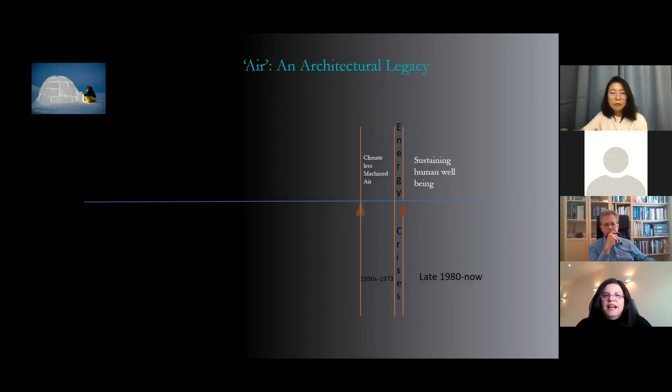But air has actually had a major role to play, and if anything, if we review the architectural legacy, it actually tells us something about who's breathing this air.

So if you look at ancient Egyptian temples, you find that the great court here, meant for the public, the common people, to come and appreciate the king and the elite priests, they were only allowed through a very small door that would humble their existence into this courtyard that was not shaded at all, left in the sun, feeling very uncomfortable with the temperature of air, while all the priests and the elites of the government would enjoy the hypostyle hall, where for the first time the idea of the clerestory is introduced, and the hot air would rise up, leaving them feeling cool.

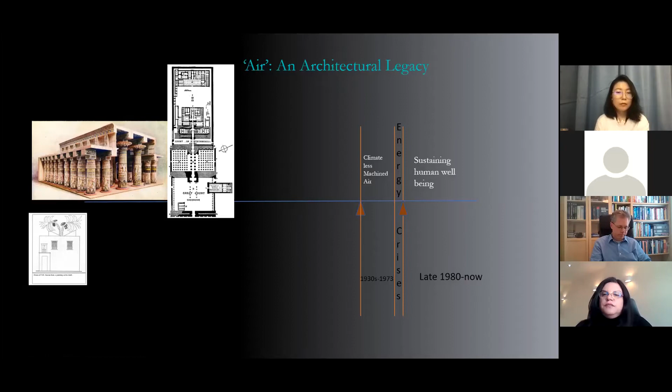Courtyard houses, as often mentioned in literature, are another case of understanding how air differentiates between people, because the wealthier the merchants were, the wealthier the owners were, the bigger the courtyards and architectural systems they would own. And it's important to mention the word 'systems' here because they were not elements - vernacular architecture worked on the principle of systems. So the air pressure differences between the openings, the wind catcher, and the courtyard would all interface together to provide a comfortable environment.

But if anything, they show us how the elite constructed their buildings with sustainable materials, very expensive wood, and provided those courtyards lavish in their landscape with their pools just to temper the air, in what we would consider vernacular architecture.

And if we go further to Cairo again, where we look at the 16th century courtyard houses - Beit al-Sihaymi, for instance - lavish with its courtyards and very large areas of openings, almost 90% window-to-wall ratio, covered by beautifully constructed wooden lattices that capture the idea of how air moves. So the openings of those wooden lattices were changed to allow air from the bottom to escape from the top, and also the building height would influence that.

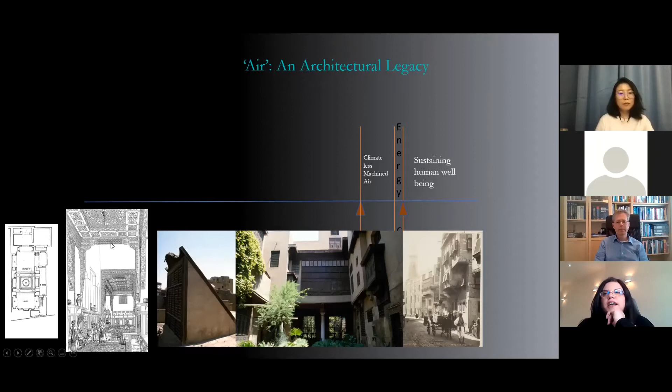If we go even further in history, look at 16th century Europe onwards, providing houses that are built on rivers where the air velocity is known to be the highest because it's unobstructed, and that would allow for natural ventilation.

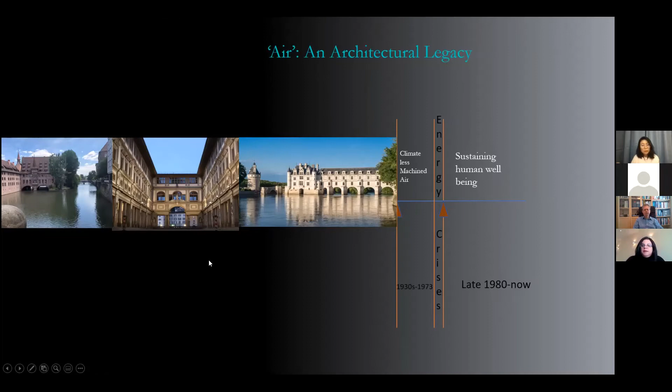But if we look at the size of the openings and the width of the plan, it's always better ventilation for the richer, while the poorer would have smaller windows. This is even manifested in the facades, like Chateau Chenonceau in the Loire Valley.

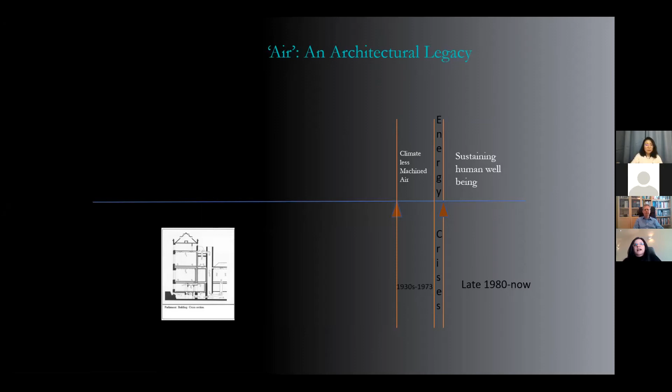Going forward to the UK Parliament, air forms a different kind of expression because air is drawn to the bottom, then heated, and then circulated through the building using this stack effect of buoyancy.

But it's disconcerting because it really highlights this quote mentioned by Adley: an analysis of air reveals who belongs and who does not, who is deserving and who is not, in a constellation of megacity inequality. And if anything, this still unfortunately exists.

So if we look at how air influenced the formation of plans, sections and elevations of buildings, office buildings give us a good start - the U shape, the square shape with an enclosed courtyard, or the Chrysler building, a 1930s multi-story building, quite complex but naturally ventilated.

Let's not share air - air needs to be mechanized, controlled, to the point that we can import this architecture to anywhere in the world.

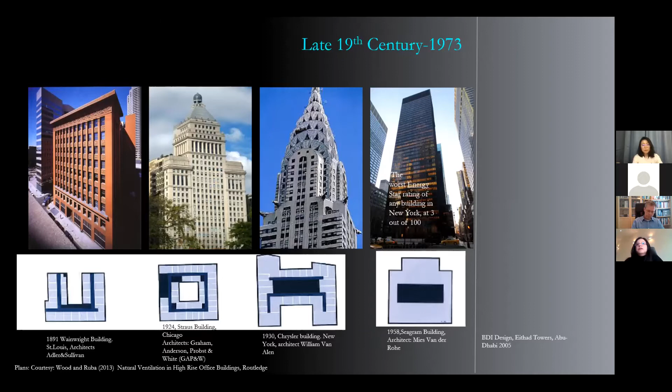How air is used and expressed in buildings is quite interesting when we look at the 1950s idea of Buckminster Fuller, when he said it's more ecological, more sustainable to cover the whole of Manhattan in a geodesic dome that would control the air inside.

Not an idea that was discarded, but actually taken forward. If you look at BDI's design of the Etihad Tower in Abu Dhabi, one of the hottest spots on Earth, it's now being constructed where air is totally controlled by filters and no natural ventilation is allowed at all. The elite do not share our air.

But air is invisible and we need to quantify it. So we really need to use building and urban performance simulation.

We would have a lot of heated debates about this between us, me and Peter. But we would look at how the urban population is moving from 50 to 80% by 2050 to live in cities, with all the challenges that come with this kind of scenario, like heat islands.

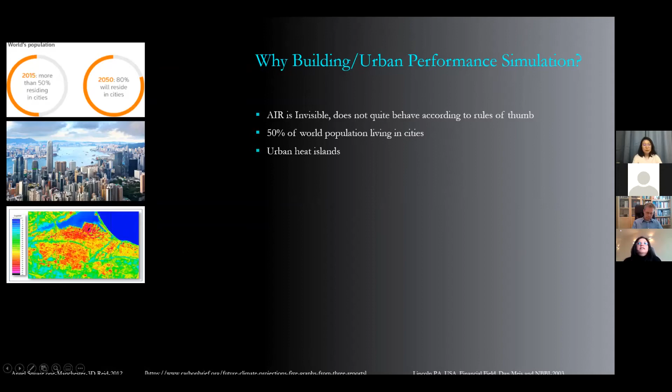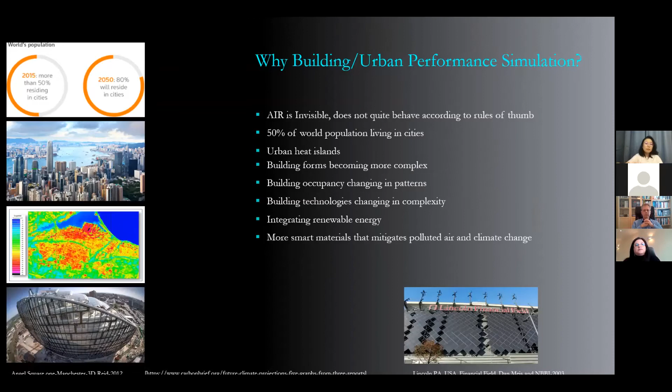And all the different aspirations to use more complicated building forms and address ideas of changing occupancy, energy, pollution, and climate change. But we've also always looked at vernacular architecture as a successful precedent for applying fresh air.

It's interesting to know that through the writings of authors like Pallasmaa, it was advocated that the sense of touch is very important.

But actually, if you look at how commercial branding works, there is this very influential statement from Lindstrom that says 80% of all commercial communications appeal only to the sense of our eyes, yet 75% of our day-to-day emotions are influenced by what we smell.

If we look at vernacular paintings of Cairo, for instance, you would see that by trial and error, commercial activities dictated an environment of fresh air, manifested in how the roof was constructed. The more regular, higher quality timbers used also reflected the type of merchandise and the quality of air.

So keeping all the hot air on the top and the fresh air on the bottom of the market, where silk would be sold in this case.

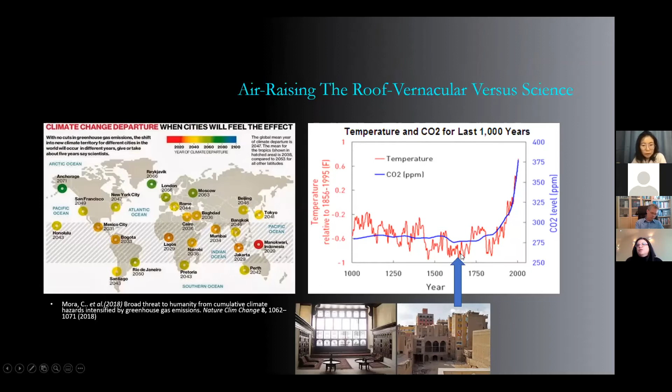We have to be quite careful, because climate change is affecting a lot of cities, and Cairo is one of them as a megacity. Most of the cities where vernacular heritage exists are experiencing major changes, whether in their urban form or in the temperature where they originally existed. If you look at the Max Planck Institute data, you'd see that Cairo and Dhaka are among the most polluted cities.

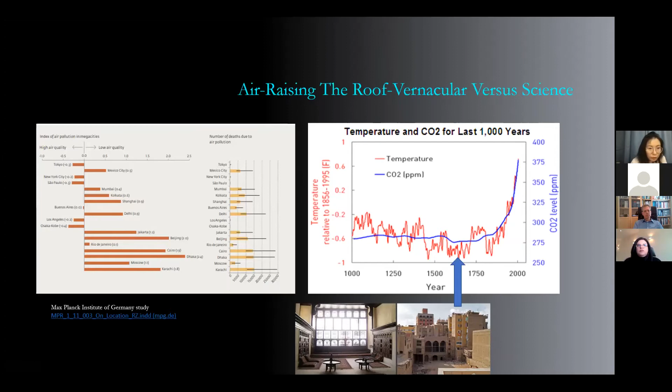An opportunity presented itself to look at the differences between renovated and non-renovated urban scale heritage, when UNESCO attempted to renovate the oldest spine in Cairo, the Fatimid Cairo. That city itself is a small city among others in Cairo at the moment, and it was constructed in 969 AD.

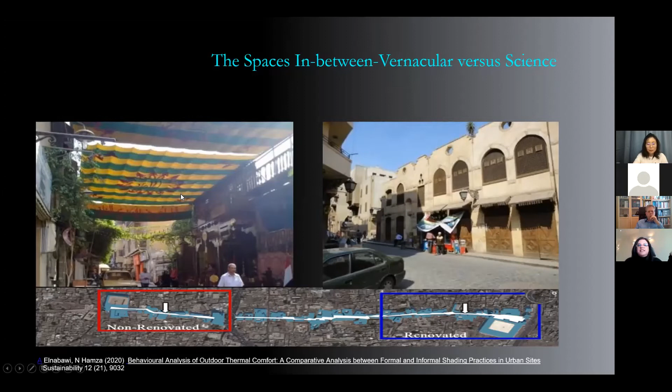UNESCO renovated part of it, and as you can see, removed all shading systems, unified the facades and shop openings, really trying to gentrify it. In the other non-renovated part, occupants and users of the space were left to do whatever they wanted, and in this case, by trial and error, shaded it with a retractable system. So we were interested to know which space would perform better.

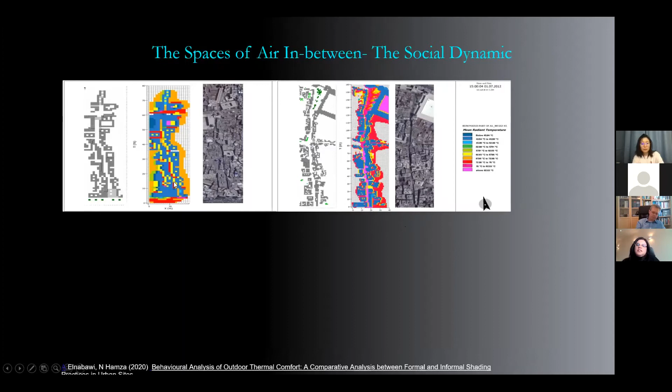Through dynamic urban simulation, this is the spine of the renovated area, and this is the spine of the non-renovated area. You can quickly realize that the mean radiant temperature in the non-renovated part is actually performing quite better, with sometimes about 10 degrees difference.

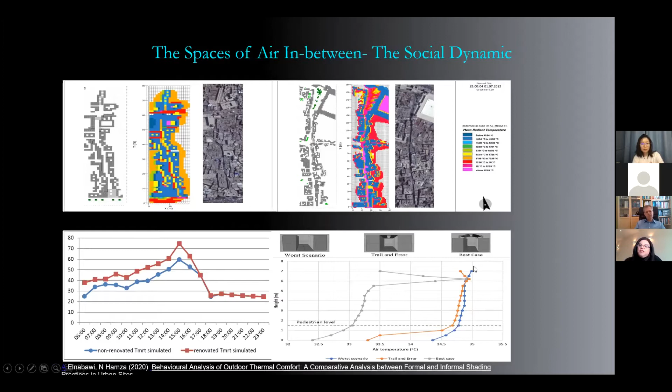So the unshaded part was really the worst scenario undertaken by UNESCO. The trial and error approach, which responded to the historical paintings of the area, was doing much better, but even better when we quantified it and studied this effect using simulation and looked at another configuration that could also be used to cover the markets.

Markets are interesting because they evolved, and in Cairo specifically, the center of Cairo—most of you would have seen it in the recent presentation of the movement of the mummies to the museum—that central part of Cairo was also designed by Haussmann, so it's known as Paris by the Nile.

In this area there was a lot of image importation of architecture. So the green indoor markets were introduced as a symbol of providing a place for the elite to come and visit and do their vegetable shopping during the day.

What was interesting here is that, again, trial and error provided excellent levels of ventilation. As you can see, the shops were able to maintain the outdoor temperature profile indoors without anything—this is different from talking about thermal comfort in the cities here.

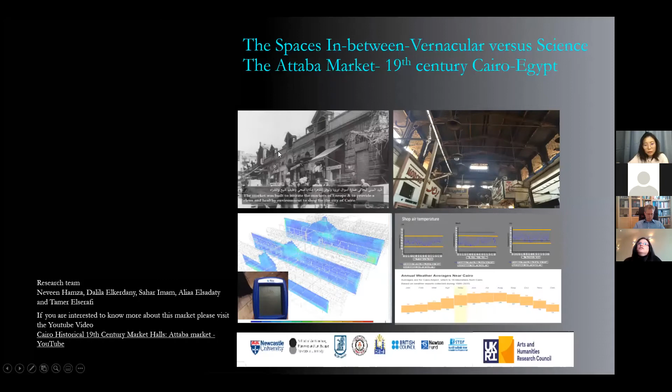The natural ventilation was working, and most importantly, although outside the market at the moment the levels of vehicular movement increased to very high levels, creating very high levels of carbon dioxide as a base—586 ppm rather than the usual 350-400 level—the building itself, through its natural ventilation elements and their expression, was able to keep the building as it is.

Most interestingly, what we found out as a research team—this took place with Cairo University, funded by the AHRC—was that revisitation behavior was actually influenced by the invisible environments these buildings create: air, light and sound levels, with air playing the most dominant feature in the appreciation of the building and revisiting it. If you look at the shop owners who have been there for three generations, their story was a little bit different.

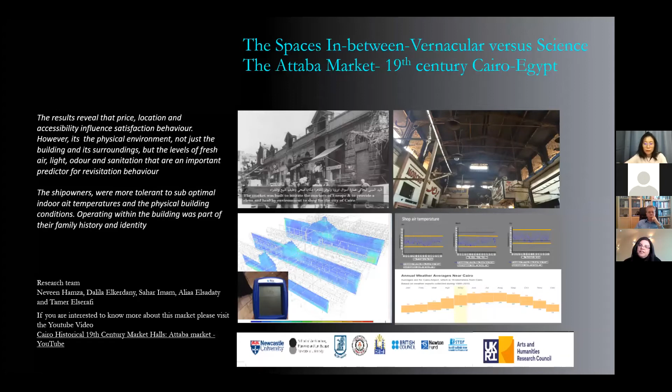They were more tolerant to what we would call suboptimal thermal comfort conditions and suboptimal air quality conditions, because of the carbon dioxide transmitted in the air, but they looked at it with pride. We found the same thing, that this issue of appreciating the building, that it gives us a sense of pride, has also had its implication when we were studying houses in Tibet, in China.

So just to draw this to a closer zoom in on architecture, we now require a much higher level and much more challenging functions of the facades we design.

So it's not just about being a climate separator, it's about being a climate moderator, and it's about providing healthy environments indoor, and of course, generate its own energy, be able to heal. And in this post-COVID environment, we wanted to provide higher levels of natural ventilation, but reduce energy demand. So this, I think, will be somewhat our next challenge.

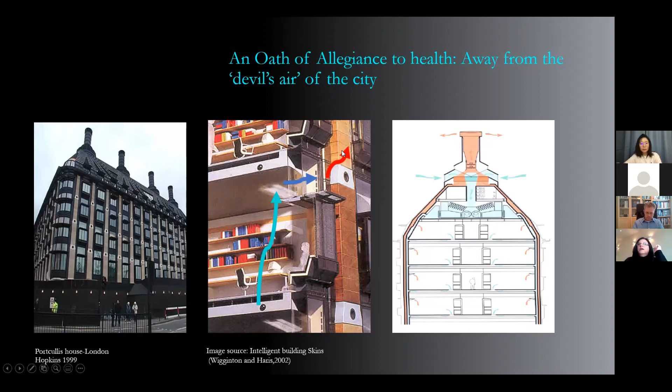Air cushioning in facades is well documented. It started by an idea of wanting to control sound levels, sound level transmissions between the outdoor environment and indoor environment, but then the cavity and the benefits that you could reap from controlling the air inside this cavity started to manifest themselves. So sometimes we use them for natural ventilation, sometimes we use them as an external duct to extract all the air outside the building.

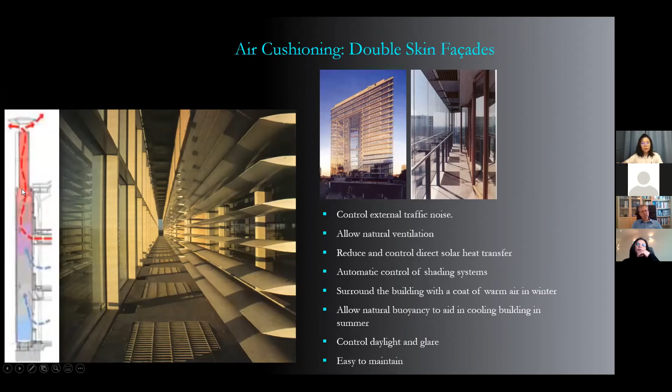But as you all know, hot air always rises, and it even has a further influence on our facade design, because we need to heighten the cavity more than the final floor, the top floor, to avoid overheating of that top floor.

So double skin facades in this case started to play different expressions, and this is a project I was quite honored to work on. It's the Newcastle City Centre Police Station, and we used building performance simulation a lot to convince the team that we could provide natural ventilation without introducing higher sound levels to the call center, which the new part of the building was going to be used for.

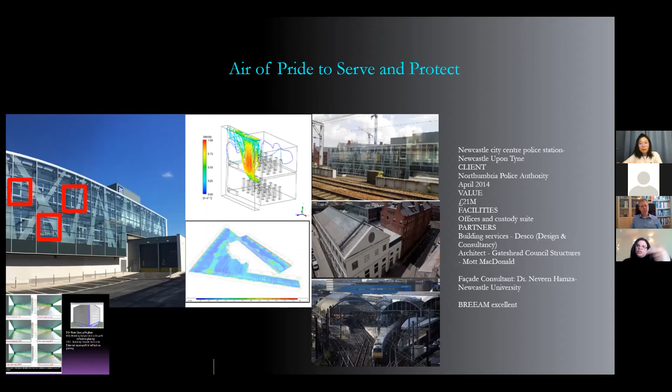And through building simulation, we managed to understand that air can be a lazy medium and it just likes to rise. So that lent itself to not putting windows on top of each other, rather juxtaposed, to allow for vitiated air to rise without short circuiting and affecting the health of other people inside on the top floor.

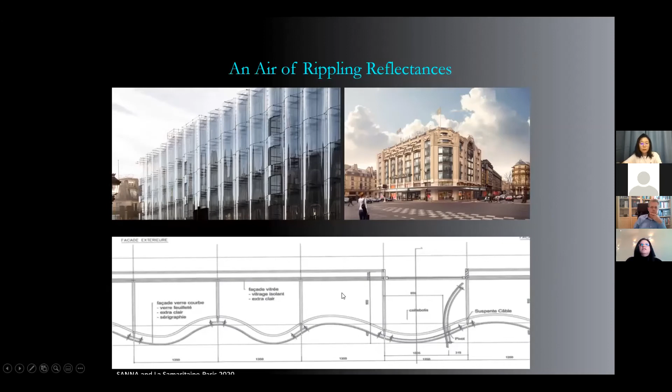So another one, we can't talk about air without talking about Swiss Re, an iconic building. I have to say courtesy to Hilson Moran for providing their simulations and drawings. An aerodynamic form that promotes views out, and the original intention of providing natural ventilation through courtyards, now called the office fingers, six of them on every typical floor, really trying to adopt this idea that we provide air as much as we can to the occupants.

An idea that didn't end up well, because unfortunately one of those natural ventilation panels fell on the plaza in 2005, and of course the easiest solution was prevent natural ventilation, forget it, we have a mechanical system, that's it. And the idea of stopping natural ventilation was not really helped, because the office space had a mechanical system that circulated air. So in every finger, fresh air would be taken from the floor, circulated in the cavity, and then recirculated in the system through the plinth.

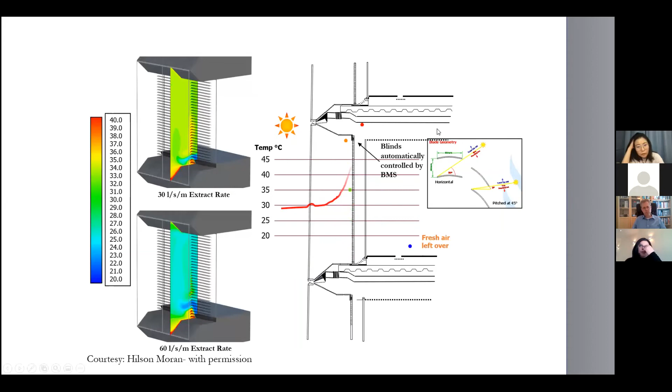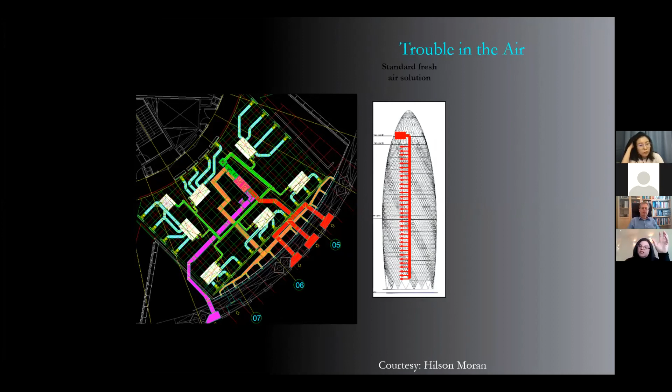As you can see here, the whole idea was providing mechanized air through each finger, so they can only use different parts of the building, very, very different from a traditional building where the air conditioning system is put on the top and circulates to the whole height of the building.

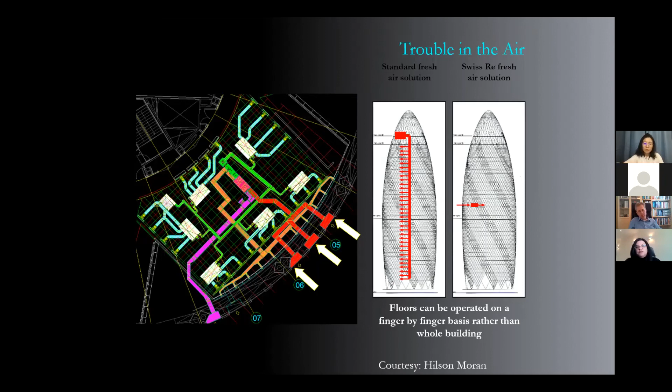So individual ones, but soon the occupants of the building started to complain of stale air. And this is an issue that is not uncommon in buildings that are controlled in this manner, unfortunately. And from then they stopped all forms of natural ventilation. And if we look deeper into it, the building services engineer provided the compliance with the regulation, in this case 5 meters per second, but instead of increasing the velocity, the idea was just to stop it altogether.

Another case where civic pride and significance plays a role in the architectural expression and how air is used. Another case of multiple layers of environmental veils in a building. And Manchester Court is a good example for this, where air is allowed in through this layer, a single layer, goes through the building and then finds its way on the west elevation to a double skin facade that also works with buoyancy. But in this case, what was quite interesting is the movement of air was decided based on what's public and what's restricted.

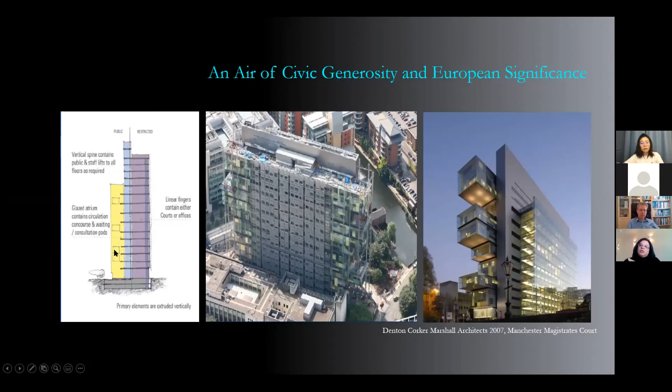So the public area here, because it is assumed that the visitors to the building would not spend a lot of time in it, they would go into the hearing courts. So that would be used to extract the air from the building. But also to provide natural ventilation into the building, it was suggested that this is possible, and air that is withdrawn from the environmental veil through the differences between the plenum of the false ceiling would then, in this case, provide natural ventilation and natural daylight to the indoor courtyards that are protected from the outside.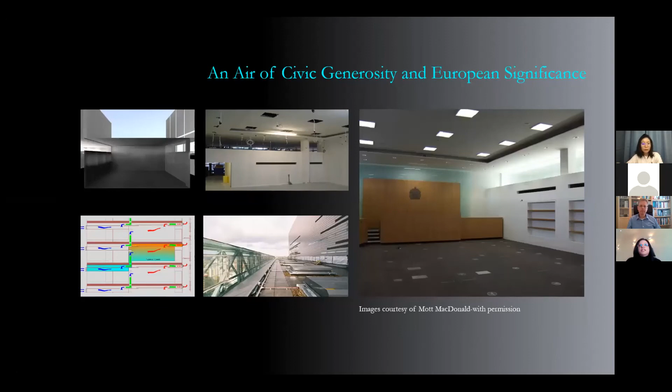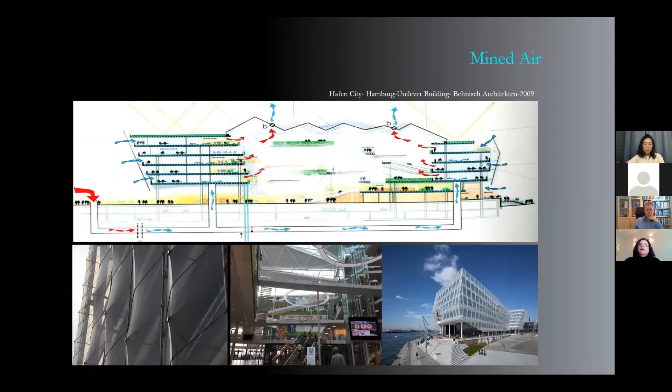Mined air, another way of expressing buildings. This is the HafenCity, Hamburg, Unilever building by Behnisch. And actually, this is an image that doesn't always represent the reality, because if there are ships, and there are various ships in here, the air pollution is quite significant. So it was decided to mine the air underneath the building, control that, filter that, and then provide it to the occupants, who are also compliant with the German rule of having no one away from an openable window by 8 meters. But unfortunately, a similar scenario to what happened in Swiss Re, and natural ventilation, although it works perfectly well, still there are complaints of staleness of air.

It also takes on quite an interesting twist here when Gensler worked with Buro Happold on this PNC tower in Pennsylvania, where a double skin facade this time was actually used to provide natural ventilation even on the higher levels. So the air pressure doesn't become a problem here. In fact, it becomes a potential. And you can see that through a very intelligent and responsive BMS system, the facade expression will keep on changing based on not just the level of air temperature and humidity outside, but also on the level of air pollution outside. So it completely controls the quality of air inside.

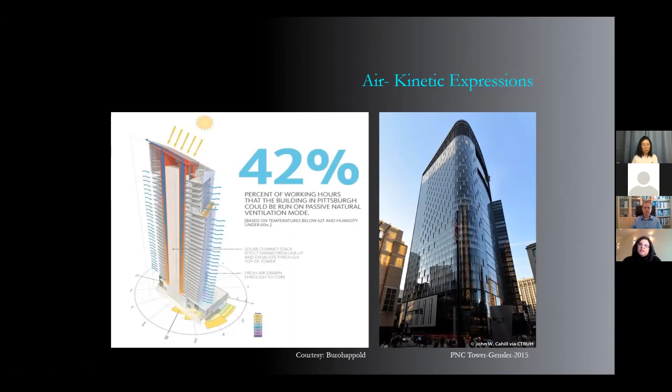And through those various studies, and this took about, I think, 4 to 5 years, so a substantial length of time, Gensler and Buro Happold say that their studies show that through withdrawing air from those openings through the floor plate, they didn't want that vitiated air or used air to go into one atrium and then find its way to various floors. So actually it goes into closed ducts, and the buoyancy is encouraged by increasing the temperature of the top, so it sucks the air up even more. And it's claimed that it provides 42% of the occupied hours on fresh air.

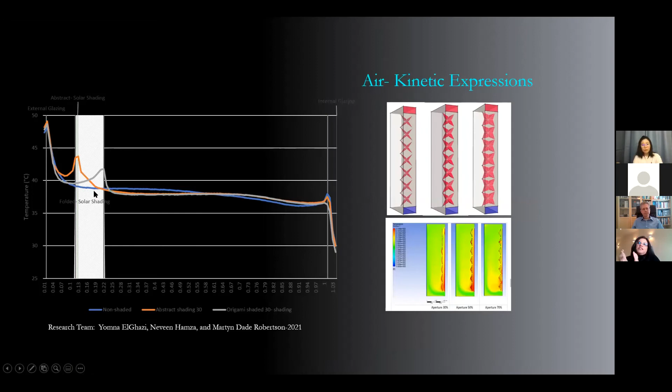So we decided to look at this a little bit further and look at that kind of stratified air, with our research team, Ms. Yomna ElGhazi, myself, and Professor Martyn Dade Robertson, to look at whether we could use the stratified air to passively, so without any use of electricity, operate a shading system with Nitinol. And we looked at how the 3D configuration of these shading systems would help in this situation. Taking that research into teaching, I'm a firm believer that whatever we research has to have an implication on what we teach.

So the students here were looking at various ways in which shading and natural ventilation could work to provide a more adaptive environment for those patients inside, using principles of environmental psychology and looking at how this interaction works. We moved then to look at the frailty in architecture and how circulating air does have an effect on the architectural expression of that.

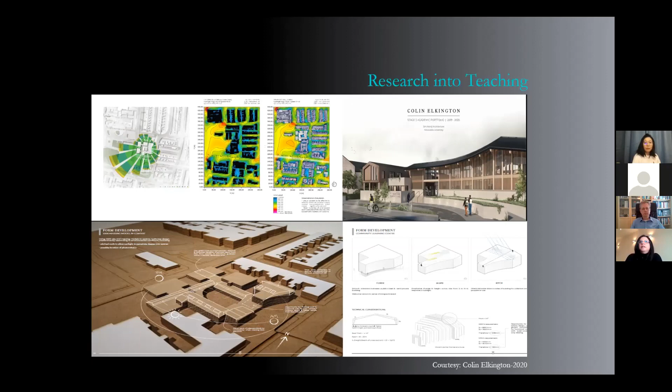So we're quite delighted that the RIBA started to take this agenda forward for making sure that all architecture schools in the country are integrating sustainability and a level of building performance simulation, and we're sure that this will help in supporting our already existing attempts to do that.

A disconcerting note, I'm about to finish. A disconcerting note that air has a political ecology of its own. In urban areas, it needs to address the conditioning of air within interior spaces. The layered politics of urban atmosphere is not lost on real estate, and real estate knows very well that the higher you go, the cooler you get. So Stephen Graham just sent a very cautionary note about that. I would, on the other hand, like to send another cautionary note as a concluding note to my talk.

The most sustainable, energy efficient enclosure is the grave. It has a dead body, you don't need to keep it healthy, you don't need to keep it thermally comfortable. You can make the coffin from biodegradable material. It doesn't need air, it's dead. So that valuable material that we can only last without for about a minute is for us to design. Don't design the sustainable coffin, it's not your job. Let's think of not internet, food, water, warmth, and rest as being the basic needs. We have to think that breathing is actually the basic need.